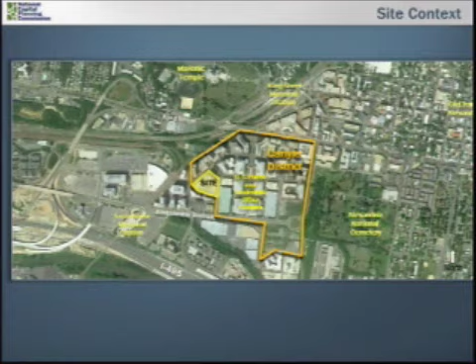Now the immediate context around the building. This is the courthouse building we're speaking of. To the north of the site is Courthouse Square South, a street on one side of Courthouse Square, which is a park to the north of the building. Jamieson Avenue is to the west, and Elizabeth Lane is to the east.

This building is a block or so to the west of the Patent and Trademark Office complex, outlined on this slide. To the south of the site are office buildings and parking garages, as well as to the east, with an alley separating those buildings from the courthouse itself. To the north are a residential condo building in the Carlyle Towers, as well as the Westin Alexandria Hotel. This building was approved by the Commission in 1991 and constructed in the mid-1990s.

At the time of NCPC's review and approval, there was no perimeter security associated with the project. Temporary perimeter security was installed in the early 2000s in response to the September 11th terrorist attacks, as well as the court being designated as the main location for trials of suspected terrorists.

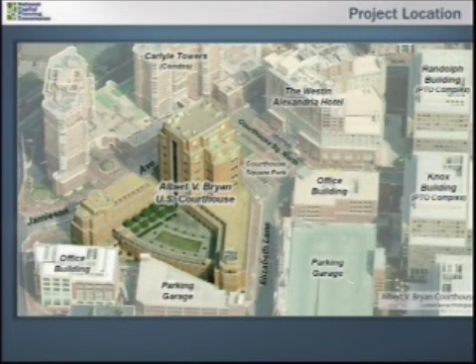Now we'll get to the site itself. The images you see are the existing site: Jamieson Avenue on the left-hand side, Courthouse Square South, and Elizabeth Lane, the roads that abut the courthouse. On Jamieson Avenue, there is currently a sidewalk with street trees and curb, as well as temporary Jersey barriers put in place in the early 2000s. This means a portion of Jamieson Avenue is not available for public use. There is a parking area for official law enforcement vehicles on the outside of the Jersey barriers. So that's Jamieson Avenue.

In front of the building is the main entrance of the courthouse for pedestrians. This road, Courthouse South, is actually closed currently, with Jersey barriers on either side. It's a fairly short road. There's also a Jersey barrier here in the courthouse square, and you'll notice some planters in front of the building currently.

Now moving to Elizabeth Lane, this is the courthouse on the right portion of the image. You'll see the temporary Jersey barriers along the curb along Elizabeth Lane, the length of the building. There are some existing street trees, and in each of these images, the street trees along Elizabeth Lane will actually be removed because they're in fairly poor condition; you'll notice they're fairly small as well. These will be removed and new landscaping will be planted. Along Jamieson Avenue, the trees are fairly mature and doing well, so the landscape area will be expanded, which I'll show in a moment.

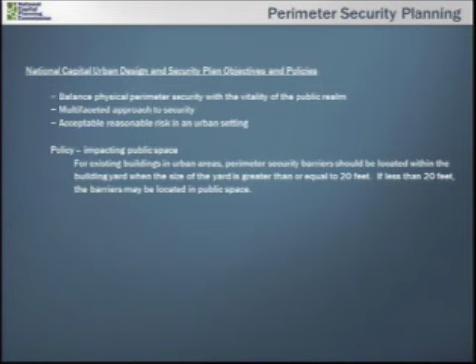Now I'll go through the security that's being proposed. The elements are bollards, with 4 feet clearance between them, and some retractable bollards, which I'll explain in more detail. There are hardened garden walls along Jamieson Avenue and Courthouse Square South, and along Elizabeth Lane there's a cable stay barrier system. I'll explain the difference between the hardened garden walls and the cable stay barrier system.

This is the property line shown in yellow. Some of it is more than 20 feet from the building, and most of the property line is less than 20 feet from the building, so a lot of the perimeter security is outside that 20-foot area, in the public space. This darker line shows the 20-foot distance from the building. Note that the perimeter security, the red line, is actually within the blue line fairly significantly around the building, except for Courthouse Square, which is again in the public realm.

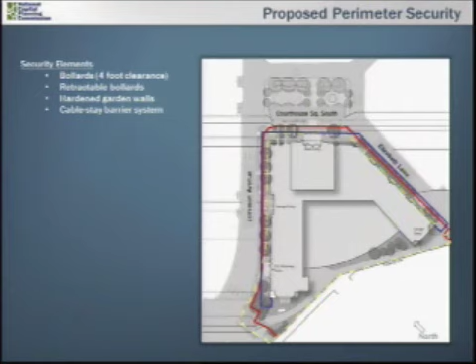For Jamieson Avenue, this detailed image shows the vehicle entry. GSA is proposing to install bollards and a hardened garden fence along the length of Jamieson Avenue. Those are the security elements. The site improvements include increasing the sidewalk area. You saw in an earlier photograph that the sidewalk was actually adjacent to the building. GSA is proposing to take out that sidewalk, add landscaping here and here, and move the sidewalk out to the street, taking over a portion of the street itself.

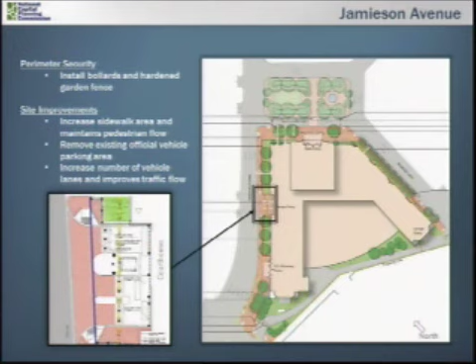This allows the pedestrian way, the sidewalk, to be outside of the perimeter security, which is right at the edge of the garden wall and landscaping shown here. The other piece is that there was an existing official vehicle parking area along Jamieson Avenue. That's being moved to Elizabeth Lane, which I'll show in an upcoming slide.

This is the Jamieson Avenue perspective, looking west towards the vehicle entrance you saw earlier. This is the garden wall, which steps down to the west, and there's a landscaped area with existing trees that will remain. The sidewalk here will be demolished and removed, and a new sidewalk put in its place. The travel lanes will stay here.

I failed to mention in the previous slide that currently there are just two travel lanes on Jamieson Avenue, and GSA is adding another travel lane. That's because they are removing the parking area for official law enforcement vehicles and moving that parking area to Elizabeth Lane.

For Courthouse Square South, perimeter security includes installing a garden wall and bollards along the north area here. GSA is also looking to open up Courthouse Square, the road itself, to one-way traffic moving to the east. To do that, GSA is proposing retractable bollards in the street right-of-way itself, here and here.

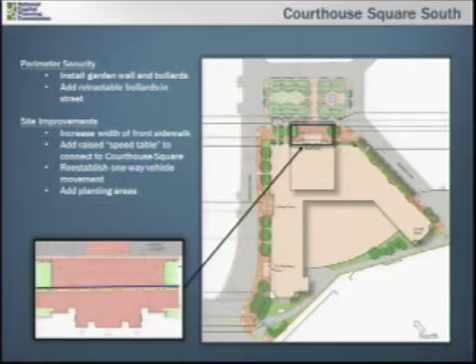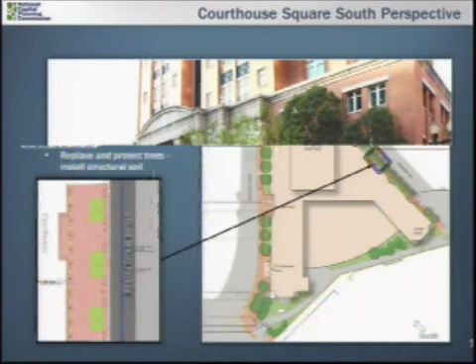This image shows the Courthouse Square South entrance and the perimeter security along the road. Along Elizabeth Lane, GSA is proposing to install a cable stay barrier system as well as bollards. The bollards are generally around the site, used where pedestrians cross at crosswalks or enter the building. There is one main entrance for employees down here, and this is the main entrance for the building.

The cable stay barrier system is located along the edge of the sidewalk. It's actually 3 feet off of the curb to allow for cars that are parking to be able to open their doors.

Site improvements include the replacement and protection of the street trees along Elizabeth Lane. GSA is proposing to do a couple of things to help protect and promote the growth of the trees. One is a light line shown on this image, showing where the structural soil will be installed. From here to the curb, all of this area is structural soil, which would help enhance the tree pits and tree growth.

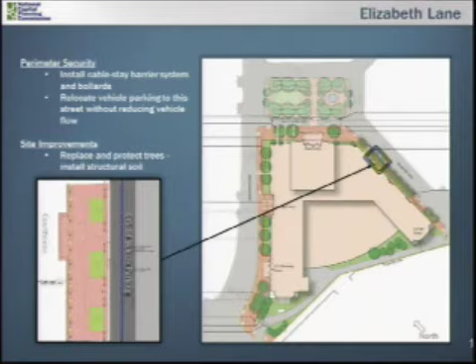The reason there's a cable stay barrier system here, as opposed to a hardened garden wall, is that the garden wall needs one large footer for the entire garden wall area. For these systems, the footer is much smaller, which will help allow and promote tree growth as well.

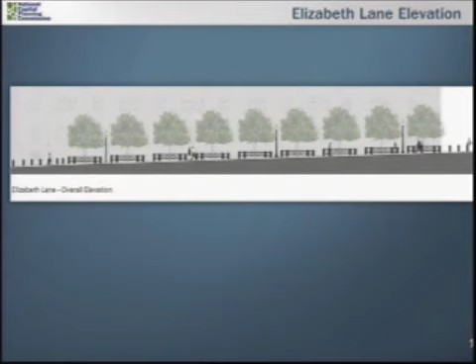Evaluation criteria: the National Capital Urban Design and Security Plan, objectives and policies. GSA is proposing barriers within the building yard when the yard is greater than or equal to 20 feet, which is in line with the security plan. GSA is also proposing barriers located in the public space when the building yard is less than 20 feet, which is also in line with the plan.

For coordination, GSA has worked diligently with the Carlyle Community Council, the City of Alexandria, the Carlyle Design Review Board, as well as the tenants, the marshals, and the U.S. District Courts, and NCPC staff on developing a perimeter security solution for the urban site that balances pedestrian movement with building security. You will see letters from the agencies and organizations in the staff report at the end, for your review.

The Commission approves the preliminary and final site development plans for site improvements and perimeter security at the Bryan United States Courthouse, and commends GSA, the U.S. Marshal Service, and the U.S. District Court for working with the Carlyle Community Council and the City of Alexandria in developing a design consistent with NCPC's National Capital Urban Design and Security Plan. It is well integrated into the urban fabric, improves the alignment of local streets, and reopens an existing street to the public while providing an appropriate level of security for courthouse employees. That concludes my presentation.

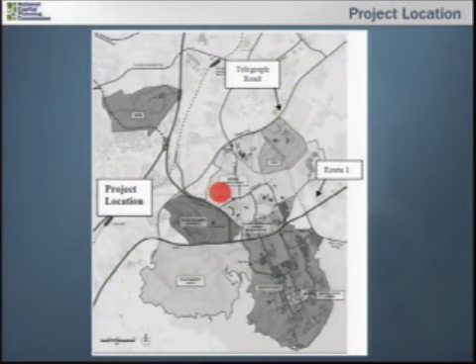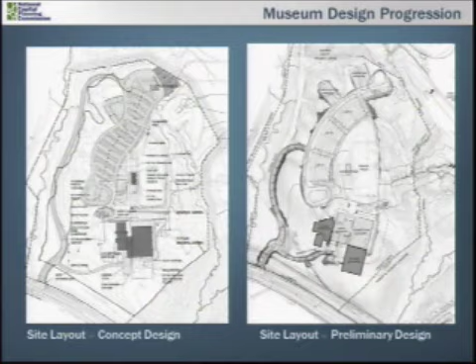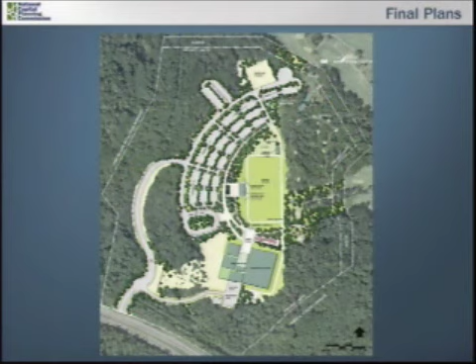As I indicated before, the Commission has reviewed both the concept and the preliminary designs. You can see here the progression of the design between the two periods, and note that the building has always been located in the southern section of the site. The building has changed orientation slightly to the northeast between the concept design and the preliminary design, and that orientation is carried through to the final building plans. So the location and the building orientation has not changed since preliminary design, and the major elements of the preliminary design, such as the access road and the parking, have not changed as well since preliminary design.

Here you can see how the building massing has changed through concept design to final design. The building will be comprised of 5 pavilions with a central tower pavilion element that's approximately 100 feet tall. So the building will be 4 levels with a basement level, and this has not changed from preliminary design to final design, so the heights of all the pavilions have remained the same. The biggest change was between concept design and preliminary design when the building lost a level due to the height restrictions.

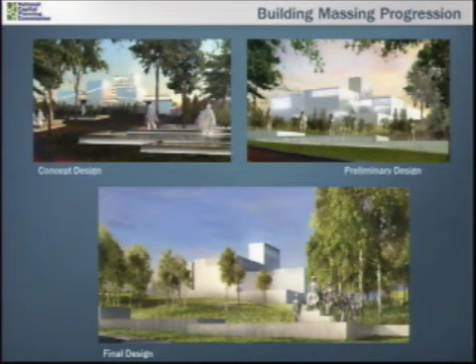The building will be constructed of stainless steel metal panels and glass panels. This has been the design palette since concept design. The Army has refined the facade of the building and has introduced metal panels in the tower pavilion, which you see here.

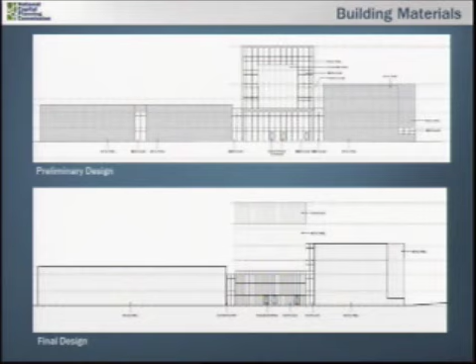Staff reviewed the building plans against the Commission's comments received at the concept design, which was in July of 2010, as well as the comments provided at the preliminary approval in July of 2011. At concept, the Commission requested additional visual analysis of the building from Fairfax County Parkway, and I will show those views in the next couple of slides. At the preliminary design, the Commission approved the building with no comments and provided comments regarding the site plan, which I will briefly discuss in a bit.

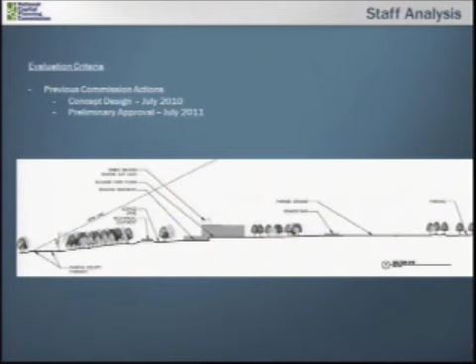Here you can see the visual analysis from eastbound. If you're traveling down Fairfax County Parkway in this location, this is what you would see of the building. The visual analysis states that the tree line will block views of the building from Fairfax County Parkway. The tower element may be visible during certain times of the year, however, it will be very minimal.

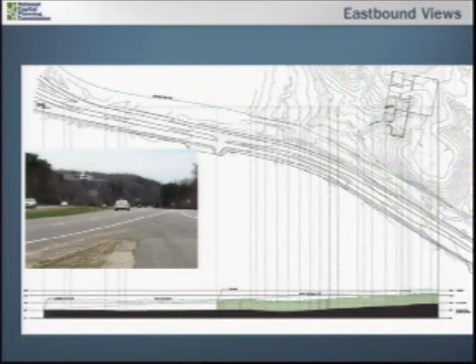Here you can see the view from westbound off of Fairfax County Parkway, and the building will be completely blocked by the existing tree line conditions. The Commission had requested this viewshed analysis to determine the impact on the views from Fairfax County Parkway, and the visual analysis concludes that the impacts will be minimal.

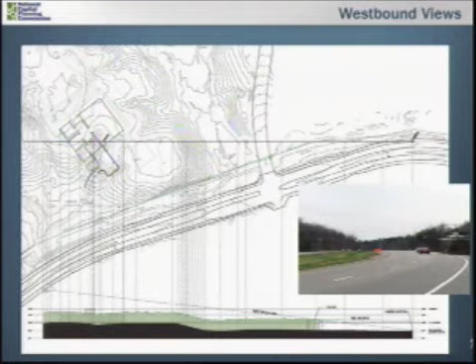Here you can see the comments provided by the Commission at preliminary. It was regarding the site elements: the reforestation of Swank Road, as well as providing a focal point at the end of the drive aisle, adding additional landscaping between the access road and the building, and providing pedestrian amenities along the walkway.

As I indicated before, the Army had submitted the final site plans with the final building plans. After review, staff expressed concern to the Army regarding landscaping and tree replacement, particularly in this location between the building and the access road. I'd like to note that approval of the final building at this time would not preclude the Army from meeting the recommendations by the Commission at preliminary design.

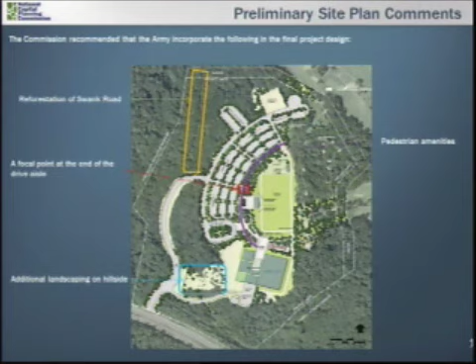Staff also expressed a desire for the Commission to review the final site plans together with the final site plans for the golf course reconfiguration project. The Army proposes to retain 36 holes of golf play at Fort Belvoir and will need to establish new holes. Of what we've seen of the golf course, 2 new holes will go in this location, a new hole will be here, and 2 new holes will be in this location. Staff felt it would be beneficial if the Commission could review both site plans at the same time.

With that, it's the Executive Director's recommendation that the Commission approve the final building plans for the National Museum of the United States Army on the north post of Fort Belvoir. This notes that the Army intends to submit the final plans for the museum in tandem with the golf course reconfiguration project, and requests that prior to submission of those final plans, the Army continue to coordinate with NCPC regarding tree replacement, landscape treatments, and pedestrian amenities. Mr. Chairman, that concludes my presentation.

Thank you, Ms. Kelly. Are there questions for Ms. Kelly? Mr. Chairman, looking for a free golf pass, aren't you? Well, I already got a membership.

But the 2 holes, it looks like you have 2 par 3s and 1 par 4 hole there. I want to know whether it changed in terms of the number. Does it change that part of the golf course configuration? No, it leaves the difficulty that is out there today. It was too difficult, I want to reduce the difficulty. But no, I understand, thank you. I won't pursue it, but I just noticed that they're going to replace those with similar par holes. Correct. So my colleagues, my golfing buddies may want to know what's going on. I may have a lot of explaining to do probably in the end, but I'll take care of that. Thank you, bye-bye, thank you.

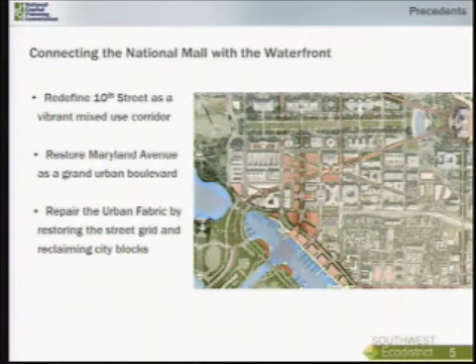And what it really tried to do, four main things: redefine 10th Street as a vibrant mixed-use corridor, reestablish Maryland Avenue as a grand boulevard, establish Banneker Park as the next great cultural destination in the city, as well as repair the urban fabric here, which is to reconnect the street grid. So the Southwest Eco District really drills down to the next level of planning within this area and starts to really look, is this feasible? Can we feasibly realize this vision?

Another very important and primary driver is Executive Order 13514, Federal Leadership in Environmental, Energy, and Economic Performance. This was signed by President Obama in 2009. This executive order represents really a transformative shift in how the federal government operates by requiring agencies to reduce our greenhouse gas emissions, and it's the first time that this metric is actually being used to track progress in sustainability.

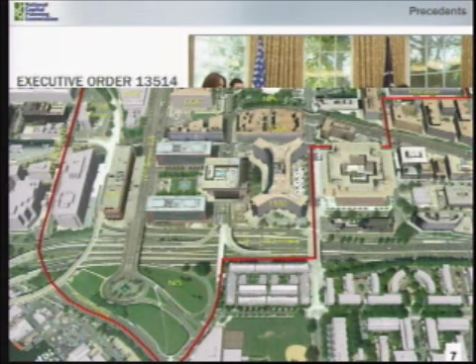So this is our study area. Again, it's south of the National Mall. The Smithsonian Castle is here, between Independence and Maine Avenue, 4th to the east, and 12th to the west. The boundary does kind of meander along the eastern edge. It's about 110 acres. It's primarily a single-use district. There's about 10 million square feet of office, either primarily owned or leased by the federal government. There is one hotel that sits here, and there's a little bit of retail and food service, most of which is buried either under this plaza or within some of the buildings near the metro station.

So the question is, why here and why now? As many of you know, this area is really on the cusp of change. There's billions of dollars that are being invested. I know you're familiar with the Southwest Waterfront or the Wharf Project, that project's getting ready to break ground in the near future. The owners of L'Enfant Plaza are also investing a great deal of money in renovating as well as expanding their facilities. And we're happy to say that new museums are now considering this area for development.

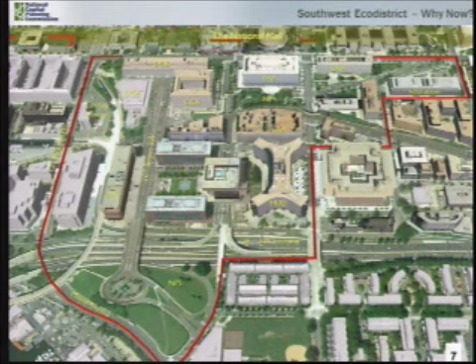And as important, the federal government is also re-examining its property on how we can meet aggressive sustainability goals, work to create a better workplace for a modern workforce, so improve space efficiency within our federal buildings, as well as seeking ways to reduce our operating cost.

So we actually kicked off the core part of this work in January of 2011 with the Southwest Eco District Task Force, as well as a technical working group. This task force is represented by 17 agencies, and on that task force, NCPC, GSA, the Park Service, and the city, which also sit on this commission, serve on the task force, but it also includes all of the other federal tenants in and near the Eco District, as well as several other city agencies.

So the Eco District Plan is really the result of two collaborative planning efforts, as well as a cooperative funding partnership, which really enabled us to do this work. NCPC staff led the work of the task force with input from the public and stakeholders, and our work focused on the 110 acres, focusing on urban development, transportation, and environmental strategies. This work was funded by NCPC, with generous support from GSA, the Commission of Fine Arts, and even the Department of Agriculture.

DCOP prepared the Maryland Avenue Plan, which essentially is this corridor here. It's called the Maryland Avenue Small Area Plan, with input from the public as well as an advisory committee made up of private property owners that exist along this avenue, or what is going to become an avenue. This plan focused on how to deck the avenue, as well as land use and public space issues along this corridor, and DCOP, the Office of Planning, funded this project.

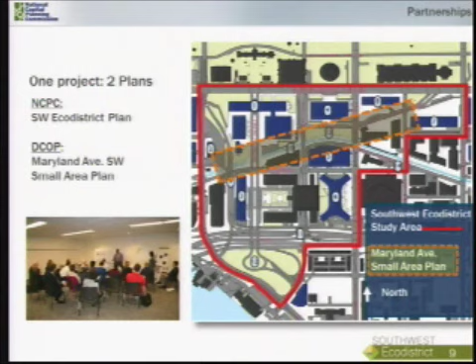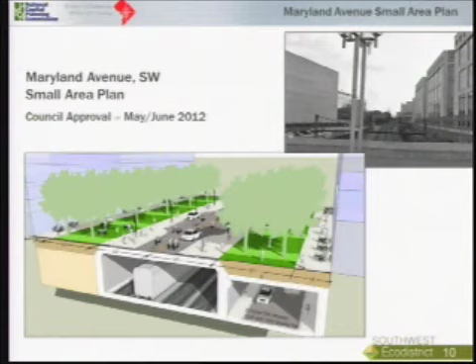And the Office of Planning has actually completed this work. They've submitted the small area plan to the mayor, and to the council, with a legislative package. They're waiting for a council hearing to be scheduled, which we think will be within the next 30 to 60 days. I think a tentative date has been scheduled by the council, June 6th.

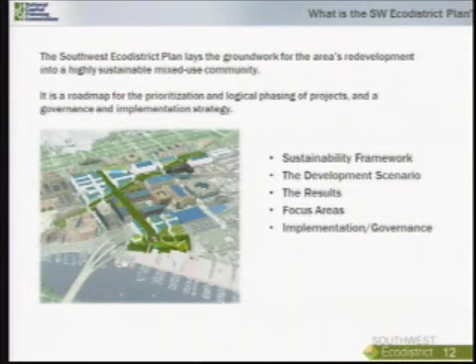So we're in the works of literally starting to wrap up the draft report now. This plan lays out the vision, the strategies, as well as the development scenario and the implementation framework that will help us coordinate improvements to meet our goals and targets, as well as optimize the use of financial and natural resources. I'm going to spend a few minutes giving you an overview of what's included in our recommendations.

So how do we achieve a highly sustainable mixed-use community? Essentially, we've set up a sustainability framework that will help guide future decisions. And as I go through this, I'm going to touch upon some of the ancillary studies that were important in informing this work.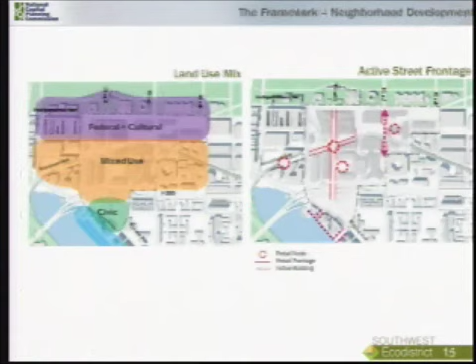The Office of Planning prepared a market study and also conducted an on-site survey. This was very important to help us figure out what is a good land use mix for this area and what might make this a successful place. The plan also includes land use and active street strategies, which address where and how to provide for a healthy mix of uses, as well as how we can increase street life within this area. It also includes a civic realm component that addresses the placement, configuration, and treatment, and the relationship between public spaces and civic buildings.

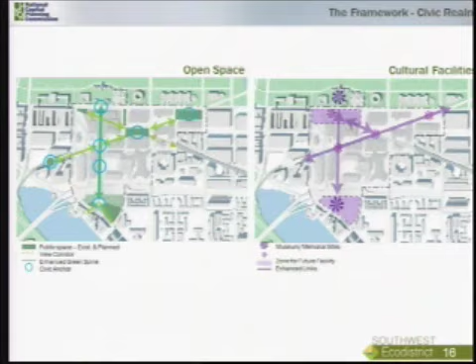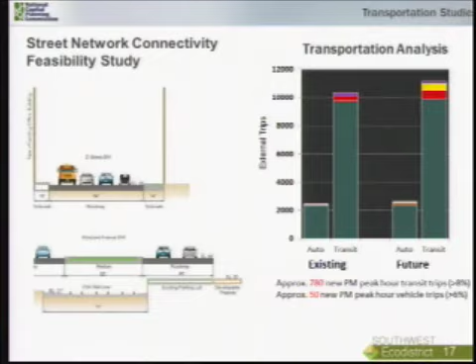We also conducted two different transportation studies. The first assessed the physical, vertical, and horizontal connections that would be necessary to connect the street grid, and whether we could actually meet the required grades and clearances to allow that to happen. The second tested our development scenario, which I'm going to summarize for you today, so that we could understand the impact that the new density and mix of land uses would have both on the roadways as well as the transit network. These studies were very important in helping us put together our transportation framework.

And that includes a street grid as well as a number of transit and transportation strategies. We've also developed some guidelines on how we could establish different characters for these streets, particularly since we're looking to put a number of streets back in place.

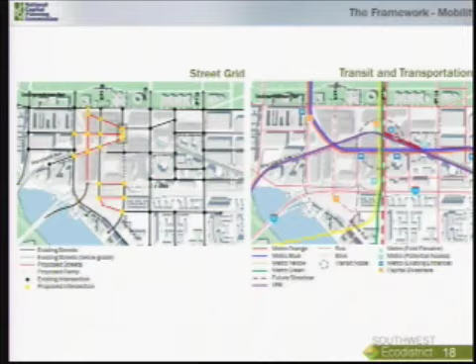We worked very closely with the General Services Administration, and also the private property owners, to assess the energy and water use of these existing buildings within the study area. We identified potential energy and water strategies, modeled buildings and these strategies, and tested potential solutions. By creating some mammoth spreadsheets, doing a lot of very complex math, and relying upon the extensive experience of our consultant team, they were able to advise us on what we believe to be the appropriate energy and water strategies that are going to help us meet our targets.

We've identified building, block, and district scale strategies and recommendations on not only how we can conserve water and energy resources, but how we can maximize the use of renewable energy within this area. And what we found is that even by lightly or fully rehabilitating the existing building stock, we can reduce our greenhouse gas emissions.

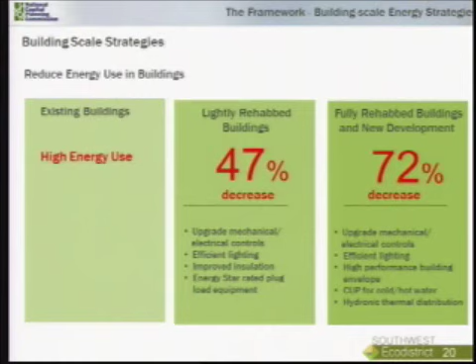However, it's not until we start talking about renewable forms of energy that we achieve a greater reduction in those greenhouse gas emissions. So some of the strategies we're looking at include investing in the central utility plant, which is located here, also employing some sewer mining strategies, using geothermal or ground source heat, as well as solar energy to help reduce the use of energy from the grid.

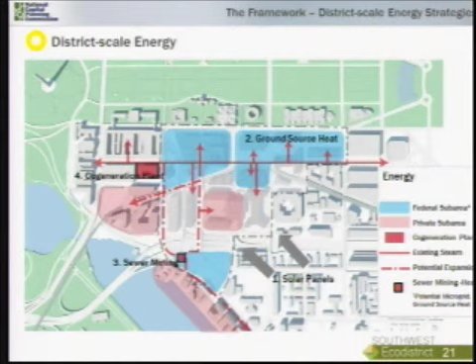We also looked at a number of water strategies, both at the building and district scale. These strategies will help us conserve potable water and practically eliminate all of the stormwater runoff from this area. It's a highly impervious area, so that's quite an accomplishment. The plan also includes waste and urban ecology strategies as well.

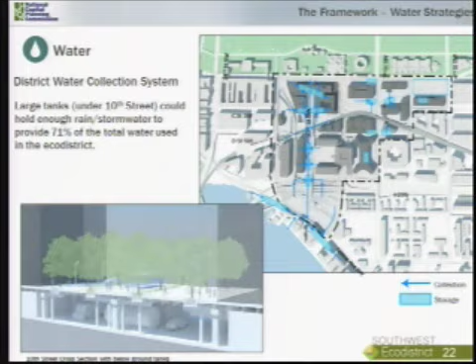So through this work, we've learned that really planning at a district scale is needed if we really want to make our city more sustainable, and if we want to create the kind of neighborhood that's going to connect the mall to the waterfront. Groupings of well-designed and efficient buildings will only get us so far. To really make a difference, we need to plan the entire precinct as a unit so that we can achieve these greater sustainability goals and ensure we get a healthy land use mix for a great community.

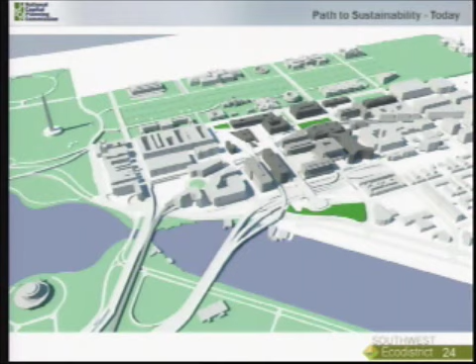I'm going to summarize the draft plan's proposed building approach to rehabilitating, infilling, and redeveloping this area that will help us achieve the targets that I'm going to review with you in a few minutes.

So this is a diagram of the existing conditions. It shows the existing buildings, and just for orientation, most of you know, this is Department of Energy, Banneker. This is the General Services Administration Regional Office Building.

So the first step is to actually lightly or fully rehab these buildings. That's what these colors represent. These are federal buildings that we would go in and do some rehabilitation work to bring down the energy use. But again, it's not until we go further that we can really achieve the kind of targets that we'd like to achieve.

The purple color here indicates those buildings where we're proposing potentially repurposing them. So what does repurposing mean? Repurposing means fully rehabilitating them, potentially building them out to their full buildable envelope or developing them out to their full buildable envelope, as well as potentially changing their use. These uses could change to potentially residential, cultural, or maybe even a mixed-use office development.

These blue buildings, the light sky blue buildings that popped in here in this location north of Maryland Avenue and down at the overlook, are the infill development opportunities. These infill opportunities we would expect to either be cultural development or private residential or office and retail development. It's really when we start looking at infill development that we can start to reconnect the street grid and improve mobility within the area.

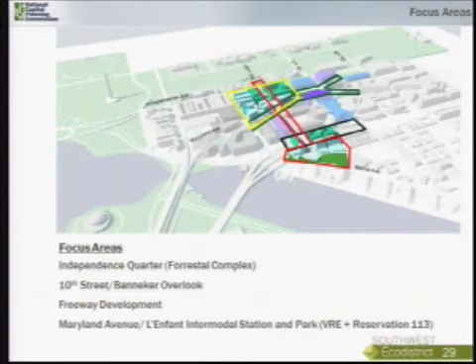So why are district scale strategies more effective? Before I talk about implementation, I'd like to summarize the results that we actually get. This is really, I think, the most exciting part.

This is what we believe we can achieve by employing these recommendations. We're able to retain 7.9 million square feet of federal office space, the same amount that's there now. By making that space more efficient, we can accommodate up to 19,000 more employees, and create an additional 2.8 million square feet of new development that could be private office, potentially residential, or used for federal purposes.

We can accommodate 1.2 million square feet of cultural facilities, allowing us to develop anywhere from 3 to 5 museums. We can even accommodate another 3 to 4 memorial sites, and create up to 8.8 acres of new and improved parks and plazas.

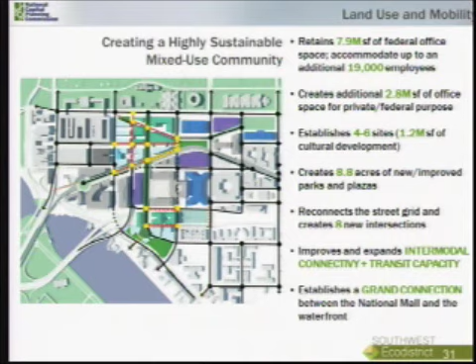We can reconnect the street grid and create 8 new intersections in this area, and improve and expand the intermodal connectivity. This also has the potential to really help the regional transit capacity. Last but not least, we can establish grand connections from the National Mall to the waterfront, from the U.S. Capitol, down Maryland Avenue, and ultimately to the waterfront.

On the environmental side, our draft plan shows how these district scale strategies can not only save us money, but yield greater results than planning at the scale of an individual building. We're able to reduce our greenhouse gas emissions by 51%.

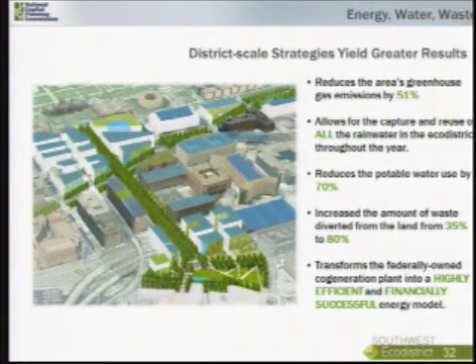As I mentioned earlier, we can capture and reuse all of the rainwater that falls within this precinct. We can reduce our potable water use up to 70%, and increase the amount of waste we divert from the landfill from 35% to 80%. It also gives us the opportunity to transform the federally owned central utility plant into a highly efficient and financially successful energy model.

So why do these things make sense? We had HR&A, a consulting firm, come in and, with the help of our consultants at ZGF, put together a cost estimate and look at the cost and benefits here. We performed a very high-level economic analysis, and our preliminary findings show that with these recommendations, the benefits will outweigh the cost.

A little bit about how that will actually happen: the big lift here is really improving the utility infrastructure for energy and water. While upgrading the utility infrastructure cost will probably exceed how we will lower our operating cost, the scale really starts to tip towards benefits outweighing cost when we factor in several other important factors.

That is the increased value of denser development and improved connectivity and public space within this area. Both the savings and revenues from the use of federal land and facilities, using this land more efficiently, as well as disposing of excess land for private development. The benefits are even greater when we factor in the intrinsic environmental and social values that are more difficult to assign a dollar value to, such as cleaner air, cleaner river, and employment and jobs, which actually do translate into hard numbers.

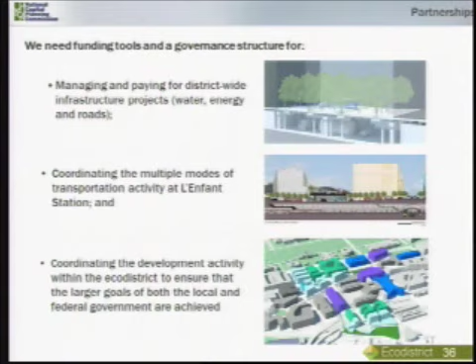So we've been looking at a variety of mechanisms by which to make this happen. It's going to require formal interagency agreements between the governments, and even potentially special legislation that would be very specific to the construction, management, and operation of these improvements within the eco-district.

So I've given you a high-level, broad overview of where we've been and where we're headed, and the results we believe we're able to achieve by employing the strategies contained in the draft plan. We look forward to presenting these details to you in July, and you'll be able to see them in the draft plan.

Our schedule to get there is to send the draft report to the task force for review and comment by the end of May. Around the middle of June, we'll compile those comments, update the plan, and send it to the commission. You'll have a few weeks with that report before the July 12th meeting, at which time we'll ask for it to be released for public review and comment. We'd like at least a 60-day review period, which would put us on track to go back to the task force, hopefully with a final plan in October or November, and be back before this commission toward the end of the year or very early in 2013.

So, Mr. Chairman, that concludes my presentation. I'm happy to answer any questions you may have.

Very exciting project, and a lot of work over years has gone into this. Questions or comments?

Mr. Hart: As I recall, one of the objectives was to try and implement a number of energy-saving strategies, aimed towards a net energy budget of zero. How close are you to that target?